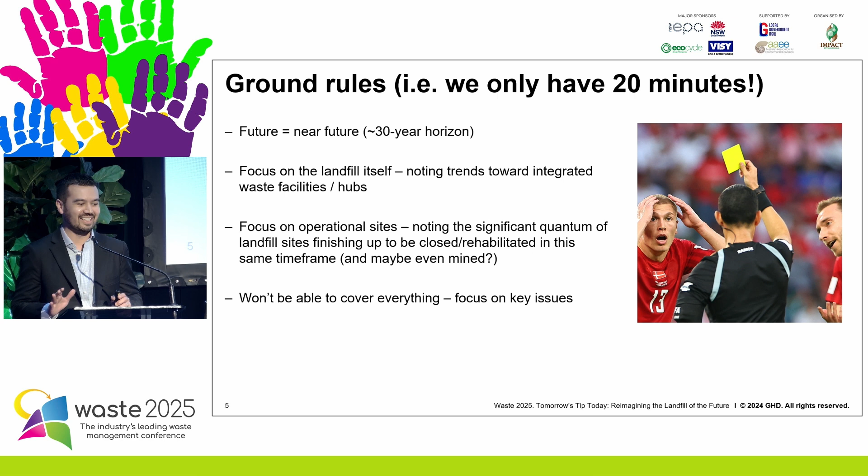I think I'm repeating myself here. I won't cover everything, I'll try and cover as much of the key issues as I can, but I'm happy to talk about it later.

It would be remiss of me not to talk about the modern landfill before I talked about the future landfill. You'll have to humour me - I'm sure most people in this room know what a modern landfill looks like, but I'll quickly go over it anyway. There's a nice picture up there of one.

You have the liner system that goes around the base there. On top of that you have a leachate drainage system, typically gravel with pipe work. Above that we have the waste itself being placed in horizontal lifts with covering going on, and eventually we put that final cap on and seal it.

In terms of leachate, we're extracting it from that drainage system and then sending it to some sort of storage solution. The picture there has tanks, but typically we use ponds. Then we're thinking about disposal - are we treating it first and then sending it to sewer, or are we looking at things like irrigation? There are a number of different methods we use in Australia.

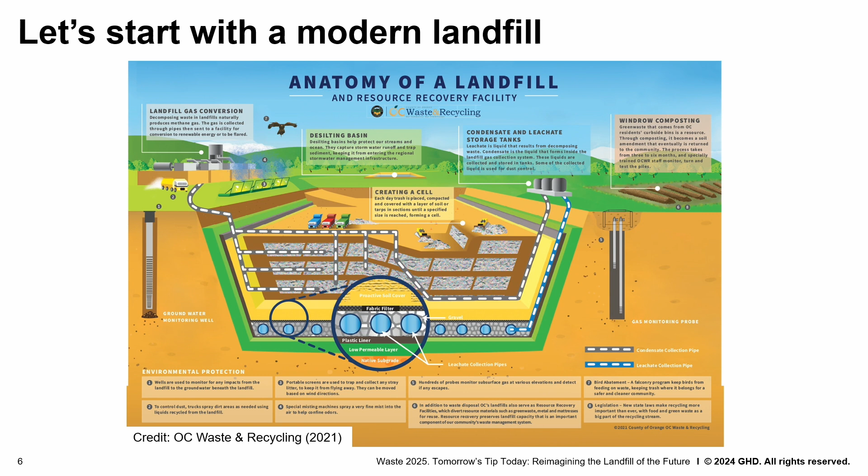From a gas point of view, if it's viable we're extracting gas out of the system, and typically in Australia we're looking at whether we can generate energy with landfill gas engines, or if that's not viable, at least we're sending it to a landfill gas flare to reduce that greenhouse gas emissions footprint.

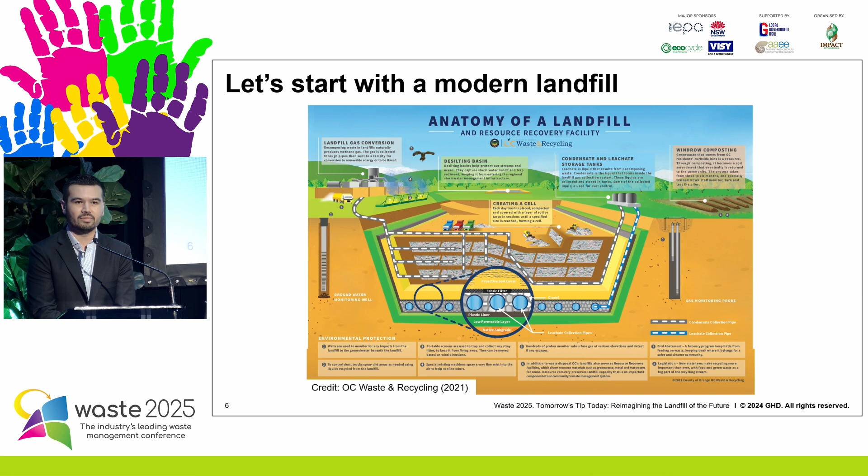The other one we've got there is the monitoring devices. So we have some groundwater monitoring, landfill gas monitoring, and surface water monitoring as well - all these things we do just to make sure our sites are complying with their licenses and that we're able to pick up issues if they arise.

So I'll start with containment. A lot of this draws me back to - I've done a lot of designs of industrial facilities and hazardous waste facilities, and I think when we look at these concentrated residual waste streams, that is generally where we're trending.

When I look at the design side of things, for a general waste landfill at the moment, it varies slightly across Australia, but generally you're looking at a clay liner alongside a geomembrane working in composite. If you don't have clay, you can look at an alternative like geosynthetic clay liners. But it's a pretty stock standard design.

When you're looking at these facilities, it's likely we can't just roll that out - we're going to have to think about more site-specific testing, whether it's testing of the leachate quality, the waste characterization stuff, and then playing that in with how we test our materials for our liner systems. So a bit more thought and refinement around how we look at that.

From a component standpoint, we have these composite liners in industrial facilities. That's not enough - we have to look at what's called a double liner system, so we're effectively taking that liner and doubling it up again. That may be required, particularly when we think about the PFAS problem we have.

There's a lot of research happening with PFAS at the moment. One of the big ones that's come through, there's a professor by the name of Kerry Rowe, very famous in our field - he's actually an Australian, he's a good guy. He's picked up that PFAS has a real impact on the service life of, say, geomembranes and things like that.

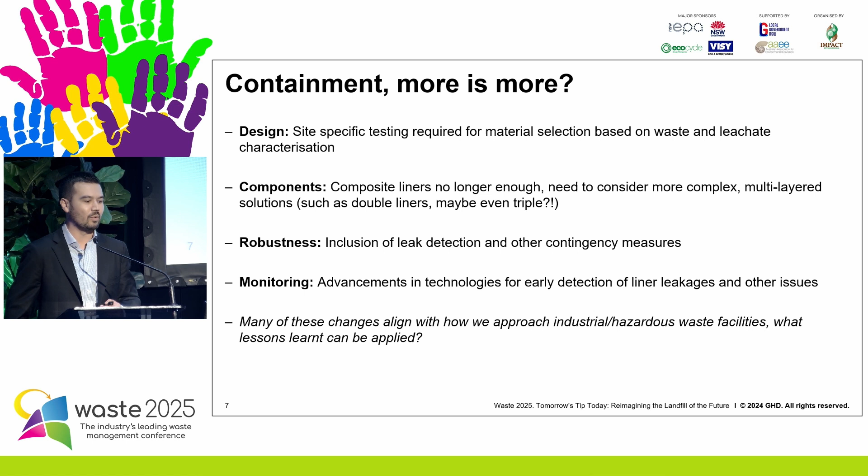Landfill gas. So I'll be careful here because I've got Dr. North in the room, but I'll try and stay in my lane a bit. Landfill gas is a great field for incremental improvements. We've been seeing that year on year. I remember when I started in waste 15 years ago, we had landfill sites that we'd look at and say, well, it's not really viable for us to get gas out of this site. But now we can come back to these sites and say, actually, with our increased optimization of our extraction measures and things like that, we can now get gas out of those facilities.

Things like that, we're seeing battery storage going alongside our landfill gas engines. We're seeing all sorts of improvements there. And in general, it's got a great environmental outcome in that the more gas we get out, the less fugitive emissions we're seeing get out of our system. So it's all good news there.

Refinement, and look, I'm a little bit biased on this one because our company does a lot of work in this space. There's a real opportunity, we think, around converting that landfill gas into renewable natural gas. And I say that because you look over in North America and Europe, there's a lot of activity in this space. You're seeing, I think, about 110 renewable natural gas conversion facilities, either in planning or that have been built in America, and there's plenty more to come.

And the reasons they're doing this: there's opportunities to reduce the emissions. You're refining that to a biomethane, essentially. And there's a lot of revenue potential putting that back in. Granted, look, that is being driven a bit by market incentives. Things like, I put some examples there around North America having low carbon fuel standards, tax credits for renewable fuels and things like that. So there is a bit of requirement of the market creating some incentive and intervention for that happening. But given what we're seeing overseas, it's very likely that that's going to happen over here as well.

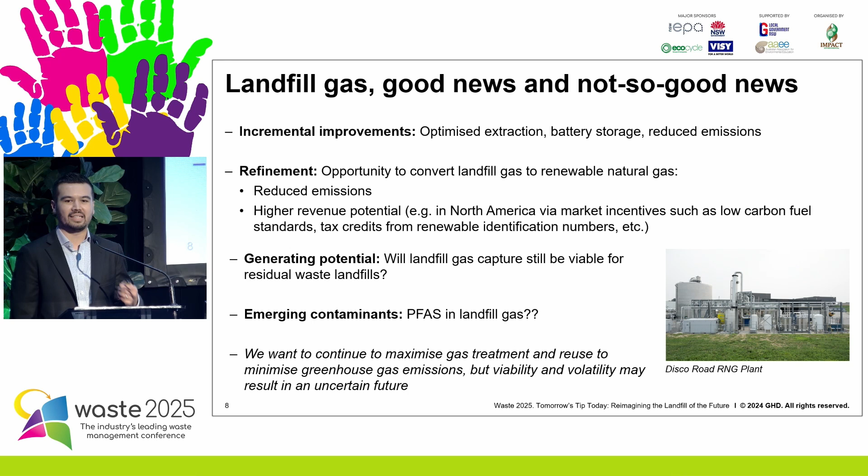So definitely a bit of a change there. And then PFAS, everyone loves PFAS. They've done some research recently and found PFAS in landfill gas emissions as well. It's just getting everywhere - another problem that may impact our feasibility. We're going to have to come up with a solution if we don't have one already, and the regulator is going to turn their eye to it at some point. Again, it's just another challenge to overcome, and maybe it impacts how we look at these things moving forward.

I've lumped in leachate and surface water into one thing, just to make it a bit simpler here. So climate change - if you're not aware, recently the Australian Rainfall and Runoff Guidelines were updated with climate change projections in there. It tells you how to apply that to your projects, say for sizing surface water infrastructure. It's a bit of a dog's breakfast at the moment - everyone's still trying to work out what it's actually telling us to do and how to do it. But we know what it means: we're going to see higher and more sustained peak events. We've seen it in the last couple of years with all these La Nina events.

It's really going to put a strain on our systems. In particular, we're going to see more leachate, obviously, and we're going to have to think about increasing the size of our surface water infrastructure. If we're starting to look at new sites, do we have siting constraints that we didn't have before around floodplains and sea level rising? So it's really about thinking more into the future - you're not sizing things just for today. You're thinking about how long your facility is going to last and future-proofing it around that. So just a bit more nuance and thought around that.

Again, PFAS - I guess other people might think differently, but I think it's at a bit of a standstill at the moment. Everyone's cognizant we have an issue: we have PFAS in leachate. The regulator wants us to get it out. The Water Authority is saying, well, maybe it makes more sense for the landfills to be doing it. The landfills disagree, and so there's a bit of a standstill around who's actually going to deal with this problem.

Putting that aside, say if PFAS removal had to happen at our landfills and we had to roll out treatment for that, it starts making you think about our disposal mechanisms. If we're going to apply such advanced treatment to get PFAS and other contaminants out, do we even need to send it to sewer anymore? Do we have such high quality water that we can look at simpler mechanisms, like just irrigating on green fields or releasing to natural waters? It's something we don't really do in Australia - the regulator doesn't like that idea at all, but it is done in America and other parts of Europe. Potentially we go down that path if we're having to spend so much time, money and effort on removing PFAS and other emerging contaminants.

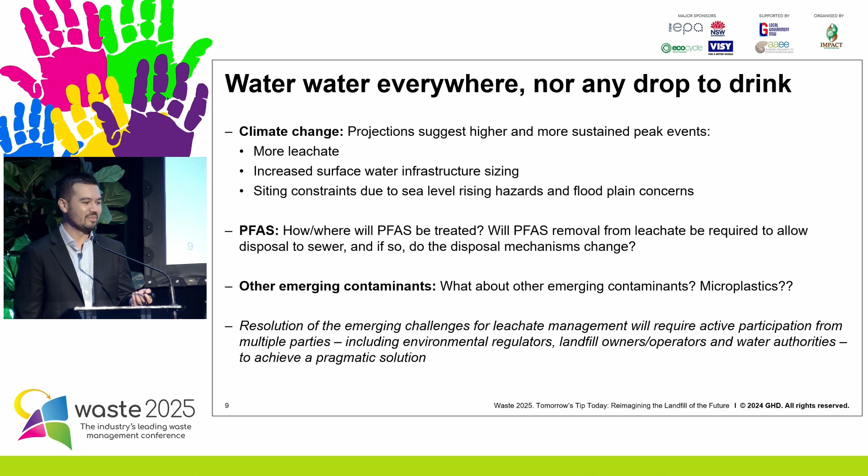Yeah, again, I love the robo landfills ones. Look, we already have a lot of great technology at our landfills, anything from drone surveys to the instrumentation and control we have for leachate and landfill gas. We can run these systems basically from a computer, another country away. It's fantastic, and this will keep going. We're seeing a lot of movement in the landfill gas monitoring market and using drones to monitor landfill gas, so hopefully that gets rolled out soon.

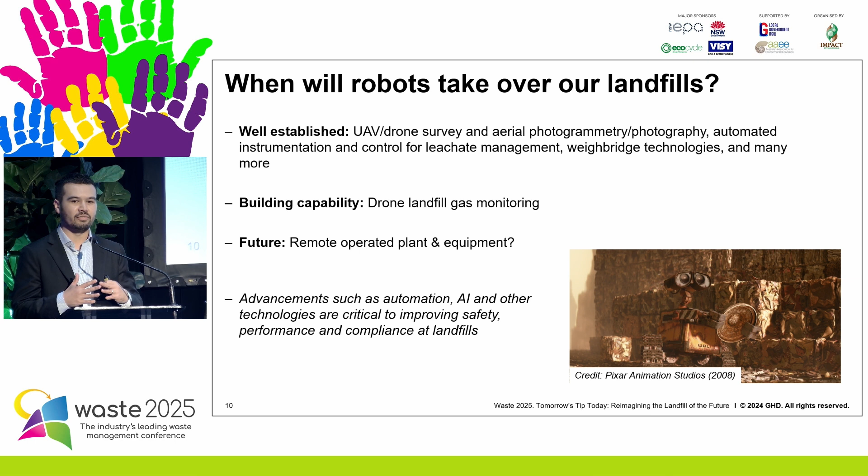We're already seeing it in construction. There are certain plant and equipment that is remote control. Do we roll that all out? Are our landfills literally run by robots at some point? Maybe, maybe not. But we should really be considering these innovations. And I think the big takeaway for me is innovations and our regulations always have a bit of a balancing act. We don't want to have too strict, stringent environmental regulations, to the point that innovation suffers, because all this stuff has the ability of improving safety, performance and compliance at our landfills if we get it done right.

Yeah, I don't think I'll speak too much to this slide, because to be honest, you guys have been beaten over the head with this stuff over the last couple of days. There's been a lot of great conversations at this conference about new waste infrastructure and how we're planning for it. I echo some of the words there about it being great to have a plan, but who's responsible for this plan? How do we have a pathway for getting to this plan, and is it reflected in our regulatory instruments when we come to get these facilities approved? I don't think there's too much more I'd want to add to that.

I've talked a little bit about siting. If we're going to look at new landfills, it's very unlikely to be in metropolitan areas. We're probably going to be putting them further away. How do we get the waste out there? All those sorts of challenges. Getting some leadership from the state, which we're seeing some positive leadership at this conference around that, and hopefully they keep delivering on that. How does the funding work? And social license is probably one of those big ones.

Another topic brought up is saying, yes, the state government has a big role in this, but everyone in this room at this conference has a role in this. To me, it's a lot about portraying landfills as we want to in our industry, not necessarily demonising them, saying yes, they have a role in our waste hierarchy. It'll be a reduced role, but still an important piece of infrastructure we have to have involved in waste management. And also our general facility operations, making sure we're operating those things as best we can, because we all know there's one issue at one landfill somewhere and there's a big domino effect, and all of a sudden the whole industry is impacted by that sort of stuff.

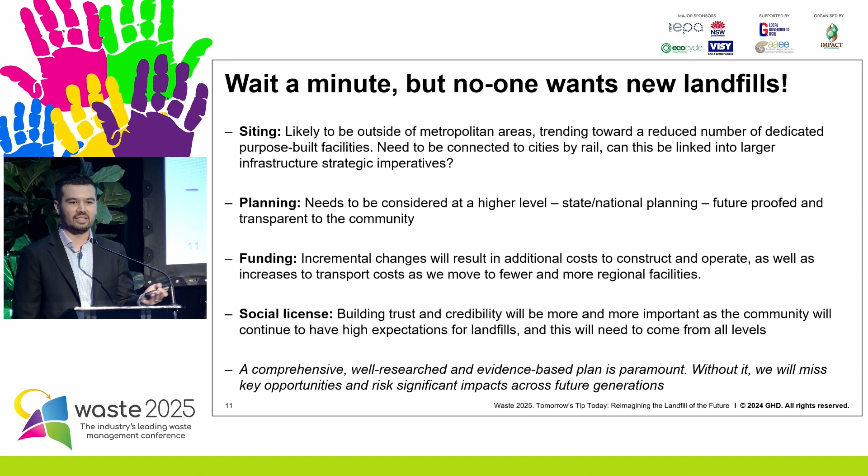So final thoughts. Yeah, look, I think nothing really groundbreaking is what I'm talking about here today. I think we're not changing completely how we look at landfills or how we manage them. We're not reinventing the wheel. It's more about that incremental change and staying ahead of the game. And I think we have a lot of opportunity to look internationally, say at North America or Europe, where they're a bit further along in their landfill journey, or even just look at general industry trends and be ahead of that. And there is that opportunity. Are we taking advantage of that?

I just said it, state and national leadership is important, but we all have our part to play, so let's make sure we're all doing what we can, because landfills are going to be here for the near future at the very least. Again, talk about that balance, not only from an innovation standpoint, also pragmatic solutions around leachate. Have we got that balance around the regulations versus where we need to get to, and just refocusing in on what are we trying to achieve?

With PFAS, it frustrates me because obviously we have an environmental problem. Let's solve it. Let's reduce its impacts to human health, but it's all getting stuck in a money conversation. So it's trying to get away from that and looking at solutions.

Yeah, I think I started on a quote. I'll end with a quote: failing to plan, planning to fail.

I think there's already a lot of positive movement happening there, but we need to keep that momentum going. We need to keep planning. I look at some of the planning they put up the other day on infrastructure, and there's a lot of scenarios. Apparently now in Sydney, we don't have a putrescible landfill problem anymore, magic. But they're looking at those scenarios and it's like, oh, this is all going to get solved by two energy-from-waste plants not only getting approved but also getting constructed, and a landfill expansion getting approved and constructed. It's a lot of ifs there. And I would hope that there are multiple scenarios being modelled in all these plans, and we're catering for all these multiple scenarios, because we don't want to get caught short, particularly in a field like landfills, where if we have to all of a sudden augment that, it's hard yakka to get the community on board with that. So, my final thoughts. Thank you.

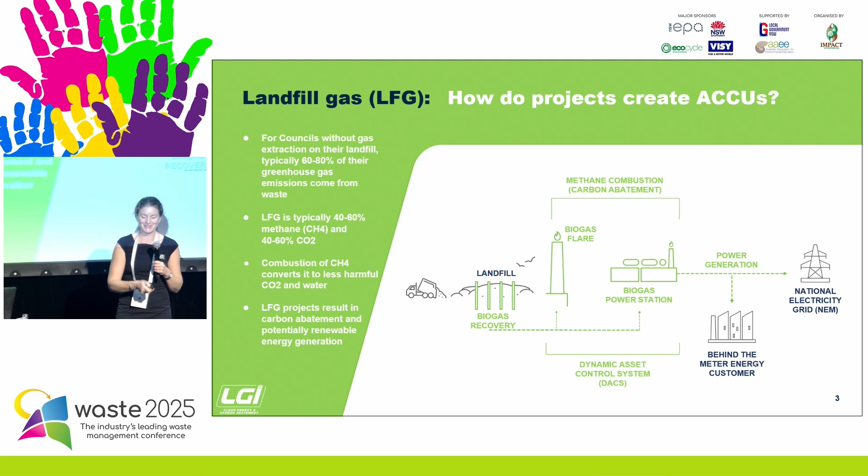So now we get to the interesting part. In Australia, since the Carbon Farming Initiative, the CFI Act, was introduced in 2012, 2013, there is the concept that every landfill in Australia ought to be doing something, ought to have some level of gas capture. So the first 30% of anything you do is considered the default baseline. When you capture all this gas, you would get carbon credits for 70% of everything that you're capturing.

Now, this landfill gas methodology has been going under a government review, if people are aware of the Chubb review, where the government engaged Professor Ian Chubb to review, because there was a concern that there was a lack of integrity in some aspects of the ACCU scheme, the ERF, and landfill gas methodology came under scrutiny. Unfortunately, these things take time, so we've been working on this new method for about 14 months. It's a fast process, as you can see. But at the moment, we have a landfill gas methodology, and we are anticipating a new landfill gas methodology. It is complex.

The calculations—I won't say loopholes, but the curvy bits around this, how you apply it to a site, what gives you credibility, what allows you to be eligible—it is complex. But if anybody has questions about projects or wishes to discuss further, please come and see me. Unfortunately, I've been living this for about 12 years of my life.

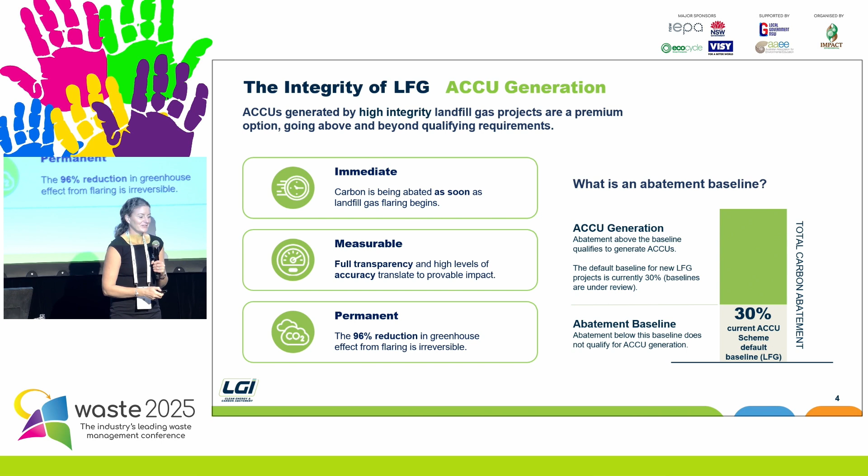The wonderful thing about landfill gas credits is that once that methane goes through your flow meter into your flare or engine and is combusted, it's a permanent destruction of the methane. It doesn't come back, it's not going to reappear. So it is the most fabulously instantaneous, verifiable, high-integrity credit you can generate under our current system. I'd encourage all landfills to consider whether they should go for this.

I'm going to give you some case studies, because we've found that a lot of local governments think their site is too small, too regional, or wouldn't be eligible to consider getting a landfill gas system. Not every site will be—there are some sites which are simply not commercially viable for a company like ours to assist. However, it's worth investigating because so many are, and we are in conversations with a great number of councils.

I'm going to go through 4 examples, and then do a very quick little exercise with some of the people in the room.

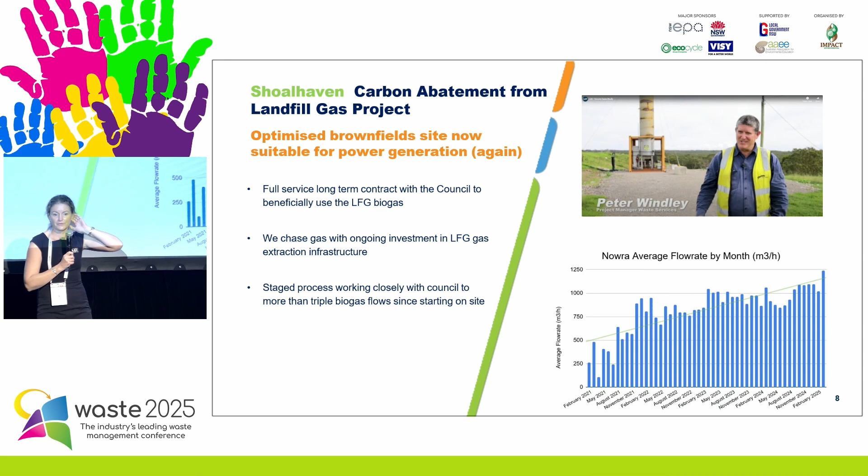This site is tagged for a power station, and you can see this is gas flow—the sort of flows we've achieved on the site. I'm going to keep going quickly because I'll get to where we're going, 5 minutes, yeah.

Finally, Taree. We have not installed the system yet, but I've included Taree because the Mid-Coast Council started the tender process about 2.5 to 3 years ago now.

When considering these projects, the procurement processes are onerous. We are seeing 2 to 3 years to obtain gas systems. We need to act quickly because the appetite for offsets, for carbon credits, et cetera, the policy environment is changing. And I believe that this window of opportunity will be closing or becoming less interesting in future.

But I want to now do a little something. I have a representative from each of the councils, except from Clarence, unfortunately, and I want you to hear from the people who have installed these systems and from the councils themselves. So my first question is to Christine Blanchard from Gympie Regional Council. Council went out to the market in 2016 with a request for tender and had a contract fully executed within 6 months. How and why did Council act so quickly?

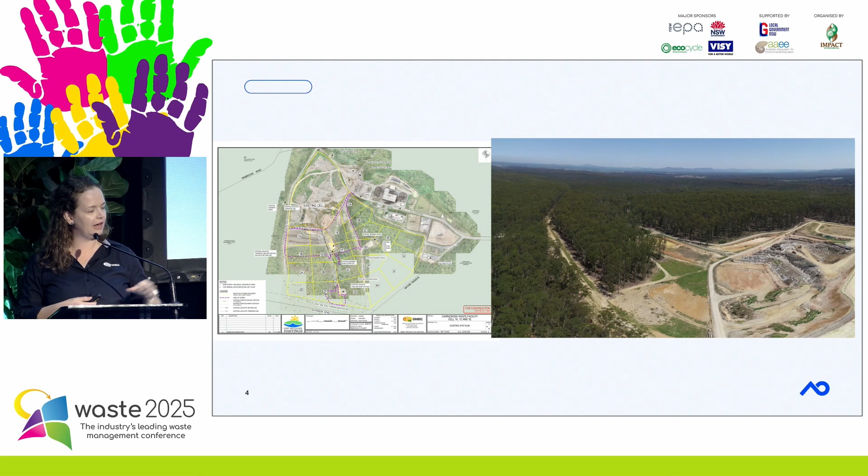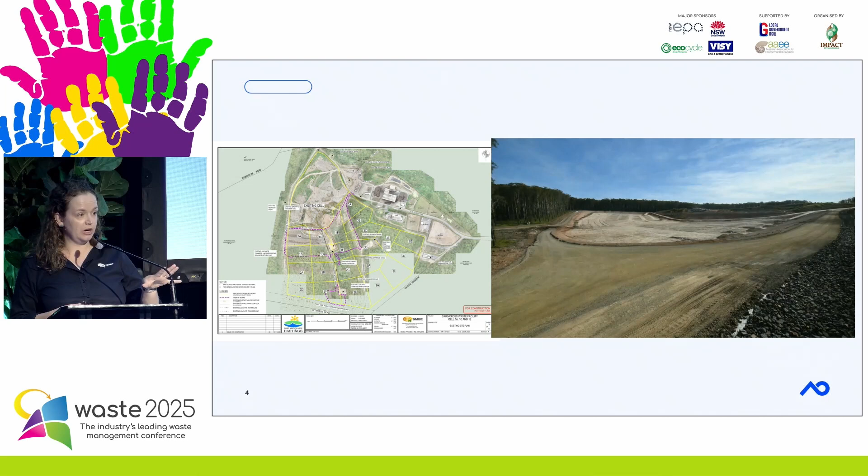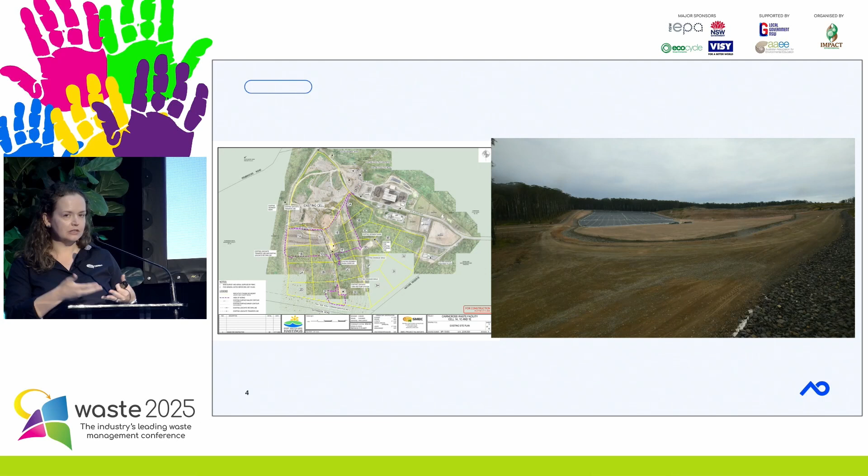It's a snazzy time lapse of the whole thing being constructed, and that's something we would definitely recommend for these construction projects. It's a proprietary product, we don't sell it, but lots of clients use them. It takes a photo every 10 minutes, and you can tell the contractors that, so you can make a pretty time lapse for your presentations, but honestly it's just useful to keep an eye on what's going on every day. We were able to monitor our construction projects across the country somewhat remotely. So yeah, you can see Cairncross being constructed there.

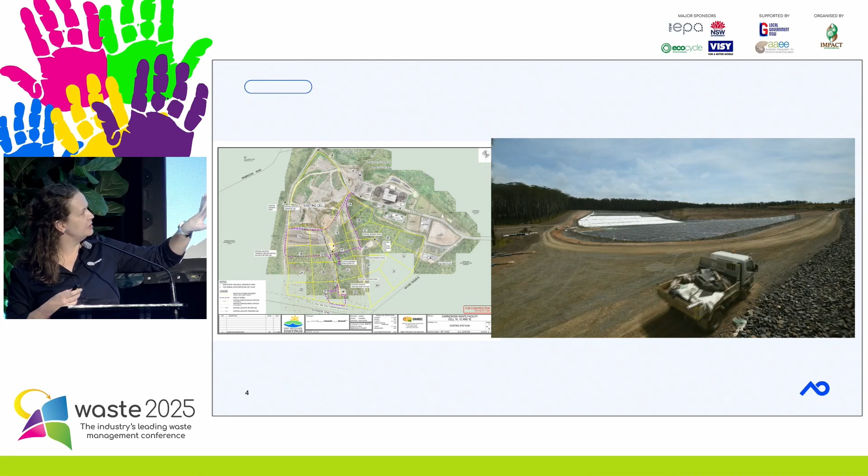You'll be coming across, there's a lovely flyover at the end that shows the stormwater separation bunds, which are there to minimise leachate generation.

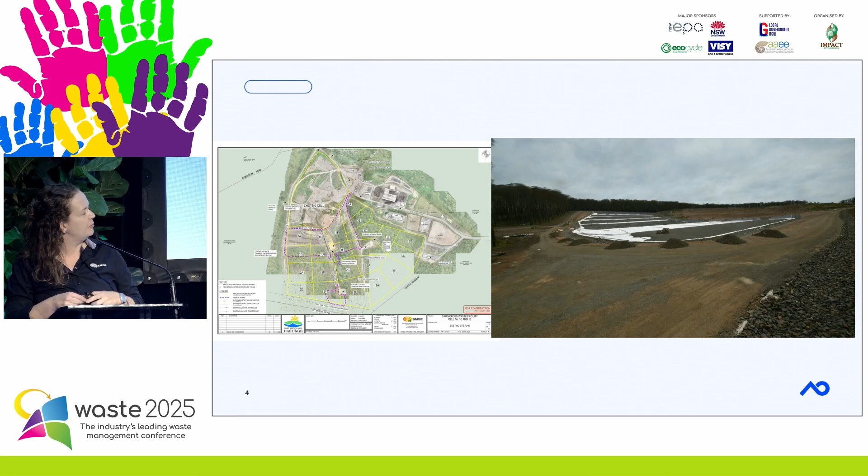I'm going to jump ahead, we don't need to watch all of Cairncross being built. Go watch it, it's on my LinkedIn. You can see the stormwater separation bunds, we're very proud of that one. Oh, there they were. Terrific.

All right, on to closure. Water flows downhill. Water management is a key principle of landfills. Everyone likes to think landfills are about garbage, or sometimes my geotechnical colleagues tell me they're geotechnical problems, but the majority of significant issues we see at landfills are water-based.

A quick primer, we've got a broad church in the room, as we always do in landfill presentations. We have three water streams. We have leachate, which is dirty garbage juice, water that's touched waste. We have sediment-laden water, which is water that's run off day cover, so it's picked up sediment and soils, looks like a chocolate milkshake. And you have clean water, which is stormwater, which is run off the grass.

When you're planning your site, obviously you've got high sides and low sides. I spent 5 years at university to be appropriately qualified to tell you that water will flow downhill. You need space at the bottom of the hill for your leachate and sediment dams. Obviously you understand the operations of your site.

Of the three water streams, sediment is the most relevant to capping. We'll go there in a second, but I left myself a note. I'm not talking about leachate today, but the other question everyone comes to ask me is, is my leachate pond big enough? And I will say, it depends.

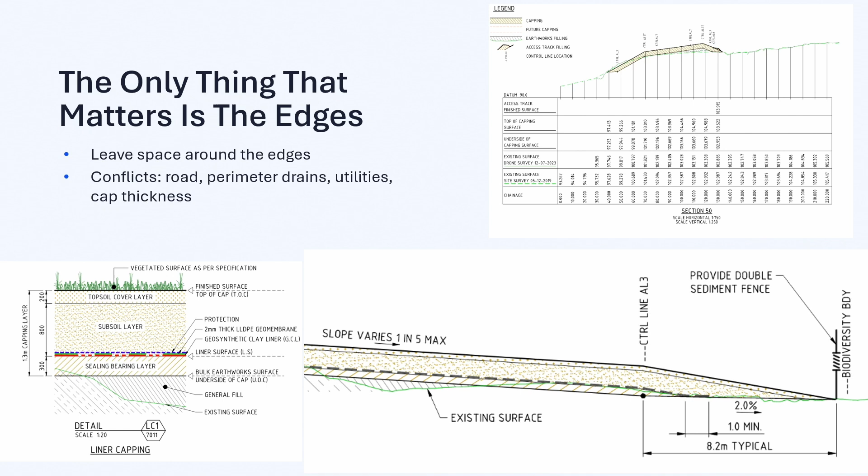So this detail here is a standard cap, 2016 cap with geosynthetics. That's New South Wales terminology that's sort of similar all across Australia and the world. That detail there is like 90% of the work, right? Put down some dirt, put down some low permeability, more dirt, more grass, off you go.

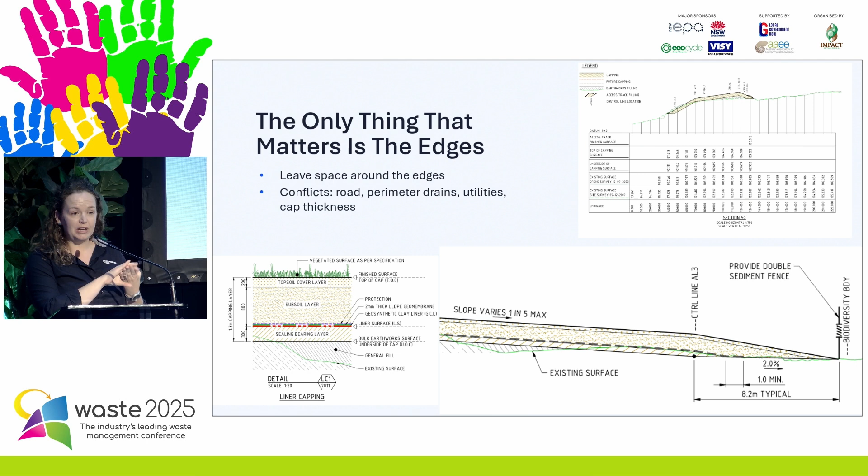The trick is what happens at the edges. The edges are constrained, so we need to think about your fence, where your property boundaries are. We need to squeeze in access tracks around the outside for monitoring and other uses. And we need to think about the drainage infrastructure, the open swales we discussed before for water flowing downhill. The cap also takes some room. Over here you can see the problem - we actually folded that down because we ran out of room. But the cap itself takes some room at the edge.

So the key message is that your waste can really only go to there. If you're placing waste, don't put it all the way to the fence, okay? Give yourself a margin at the edge. Space makes everything easier. If you're tight to the edges, get a proper cadastral survey. Most surveys don't include a full boundary definition. It's a little bit more expensive than a normal one, not anything outrageous, but it's just more than normal. It's not normally needed.

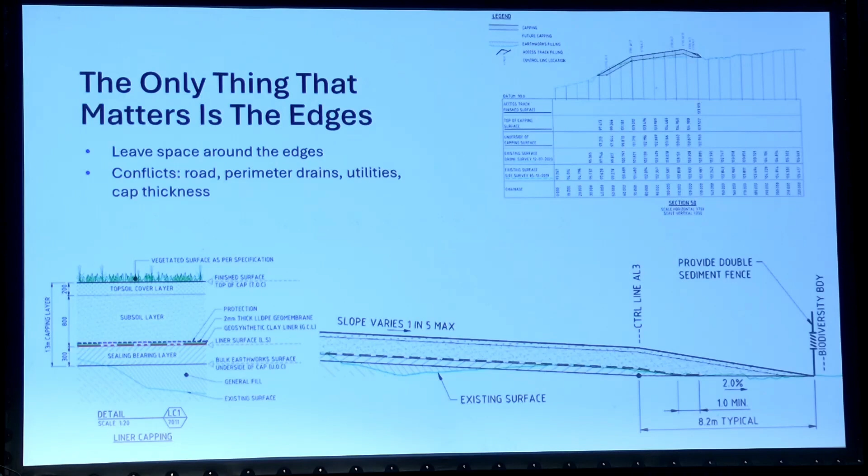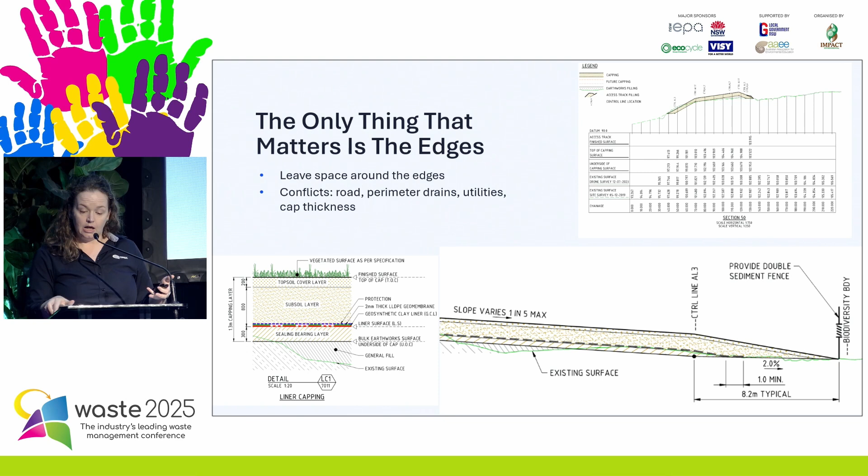The database extracts I would say are normally within 1 or 2 metres accurate, but I've seen some rural ones that are up to 7 metres out. So if you're getting jammed at the edges, and you're doing work at the edges, work out where your edges are. Clear definition of the edges helps. All right, I pointed to the right spot.

Slopes. This is aimed at helping you answer the question: how steep is your landfill? Again, a quick primer since we have a broad audience - engineers use 3 ways to talk about slopes: a 1 in something slope, a percent slope, or a degree slope. Here's a handy little table to convert between all of them for you. 1 in X is just rise over run, if you remember your triangles from school.

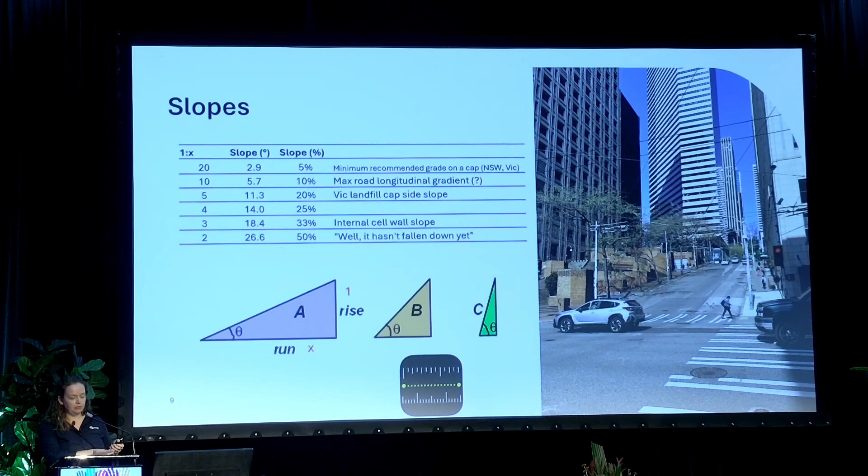Utilities, in-ground and overhead—where are your utilities? You don't know? You're in good company. Nobody ever does. We've hit more utilities than I care to admit in the investigation works we've done at landfills. If you can spend some time working out your best guess on what's in the ground anywhere there might be earthworks or geotechnical investigations, it saves a whole bunch of headache for everyone.

You can use a service locator, access your own site operator knowledge—often the operators have been there a really long time—or use a surveyor to put it on a map. Councils should have access to a GIS department, so you should be able to use that. I've always been amazed that councils seem to do water and sewer and stop there. You should be able to get your GIS department to do it.

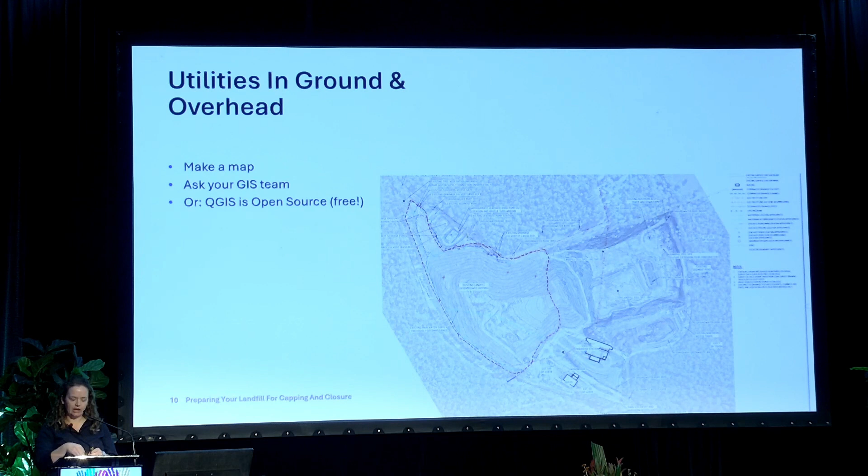If not, use a surveyor, and if you want to do it yourself, I'll give a shout out for QGIS, which is open source software. You can find your nearest computer-inclined millennial and get them to map it for you. We use that product a lot too, supporting our remote clients by sending us photos and locating them—so the use of technology is really supporting us.

I'm going to reel along. Extent of waste—how much area do I need to cap? Some sites are really well planned and that's known. A lot of our historic sites in New South Wales are a little bit higgledy-piggledy.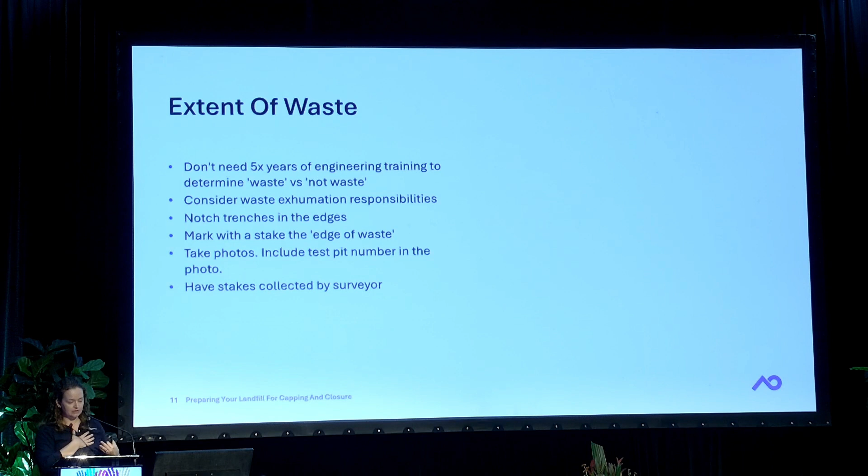On day one, I want you to tell me the edges of where this cap needs to go. We can do extent of waste investigations, but you don't need an engineering degree to dig a hole and determine if it's waste or not waste. It's certainly something you can do yourself.

We would suggest notching the side at 20 to 50 metre spacing, marking a stake as extent of waste, writing the test pit number, taking a photo—so we've got records—then having the stakes collected by a surveyor and put on your plan. See, you don't need me.

Oh, and be cognisant of your waste exhumation obligations. Some of our clients are concerned about waste exhumation and that you might need a permit. Don't forget that one.

Relocation of waste—this is something people often don't think about. For anything with geosynthetics, which is a lot of the caps these days, it's like wrapping a Christmas present. It needs to be smooth and regular. It can't be a hummocky, hilly mess. So we always have to do a bit of cutting and filling.

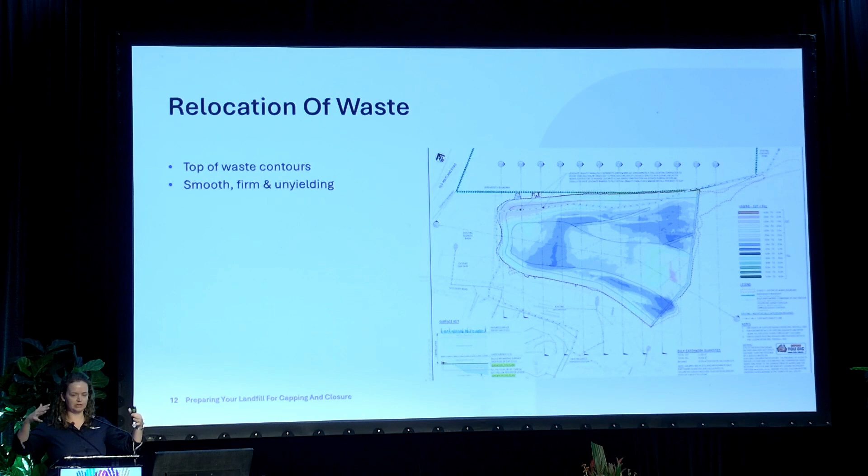So be aware that that's required. Again, waste exhumation obligations—sometimes we prepare waste exhumation management plans just to step through the OH&S side of those. Or, even better, save yourself all this trouble and just fill to the right profile to start with. If you've got top of waste contours and fill to those, it saves you a whole lot of problems.

So I think we're not doing questions now, so I'll pass it off. But thank you for your time. Thanks for listening to me, and hopefully you've left with a better understanding of the steps we go through to achieve capping and closure.

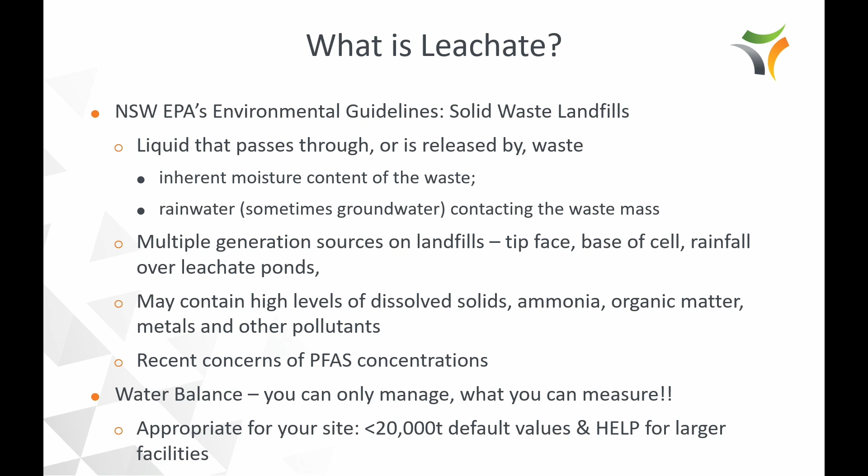And really, like a lot of the other presenters were saying, it's about planning for the future to make sure that when we are looking after leachate, we're making smart decisions along the way. So what is leachate? Basically, it's water that gets in contact with waste, or also where waste has been held. Of course waste is wet and we try to dry it out so we're not paying gate fees on water as much as we can. But also rainwater - and some people might have very special sites with soggy bottoms, as we like to call them - and groundwater touching the leachate, touching the waste, and therefore generating more.

There are multiple sources or locations of generation across the site. Obviously a key one people have to be mindful of is on your ponds as well - when rainwater falls on top of it, you're just generating more and more leachate. And of course it's got various contaminants of concern, with PFAS being the one really high on the agenda of late.

Water balance - obviously make sure you get one done, guys. You can only manage what you can measure. And of course the New South Wales guidelines give plenty of guidance on how to actually do that. For smaller facilities, less than 20,000 tonnes, there are default values. Beyond that, you've got to be looking at the HELP model - hydrological evaluation of landfill performance - a more detailed analysis of what we think is going to be generated.

First things first, we don't want it, so let's try to minimise generating it. A key part of that, as Kate touched on, was the capping side of things. But even going back to the very early days, it's planning for your stormwater and leachate management requirements from day dot of your facility - optimising landfill cell designs. It's great when you go to a client and say, look at this cell I built, it's 10 years of void space. Well, it's also 10 years of leachate generation. So be very smart about how you're actually designing your cells.

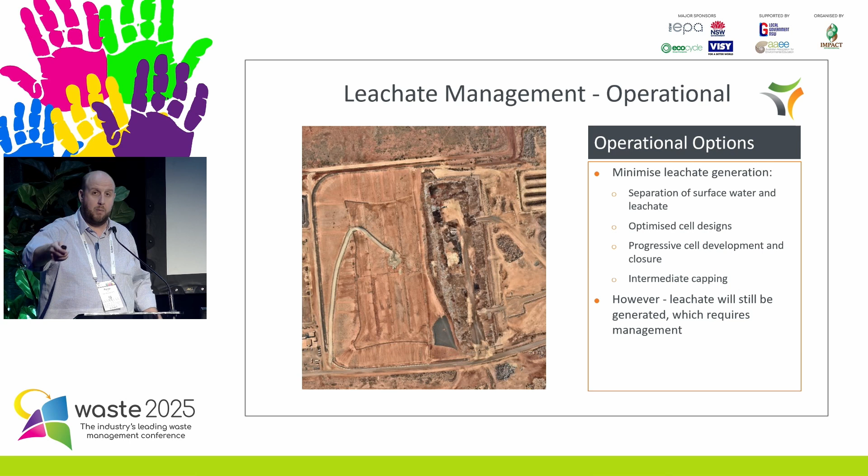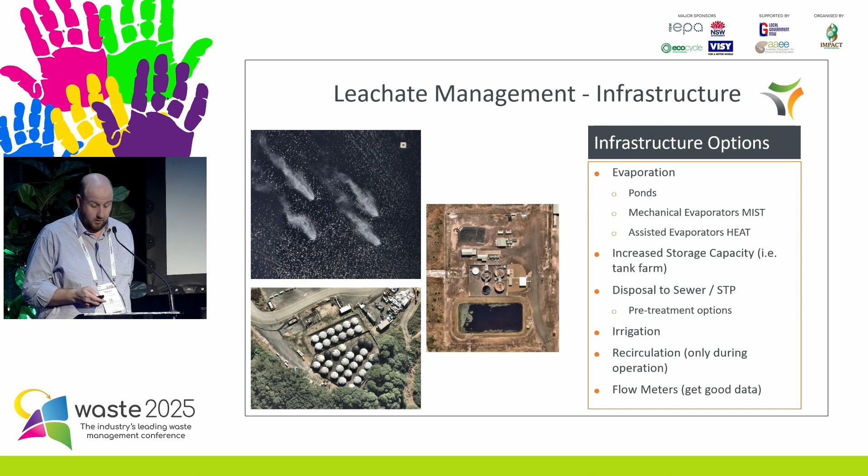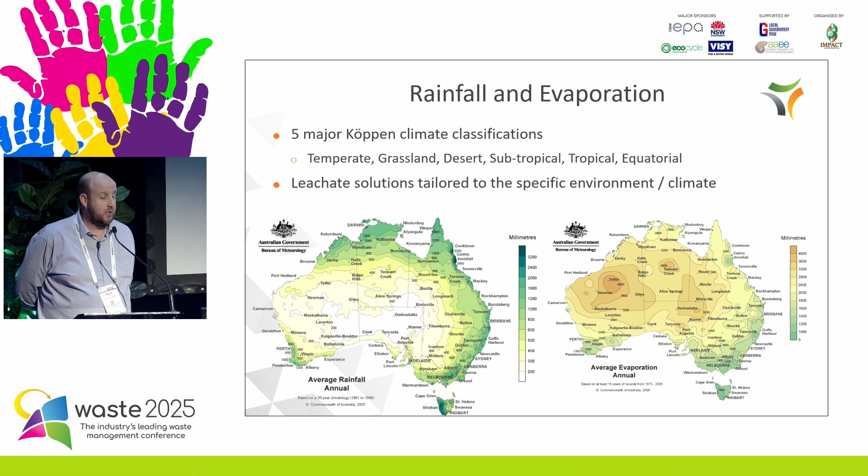Australia is a large landmass broken into 5 classifications in relation to climate, and your leachate solutions need to be tailored to your particular location in relation to generation and treatment.

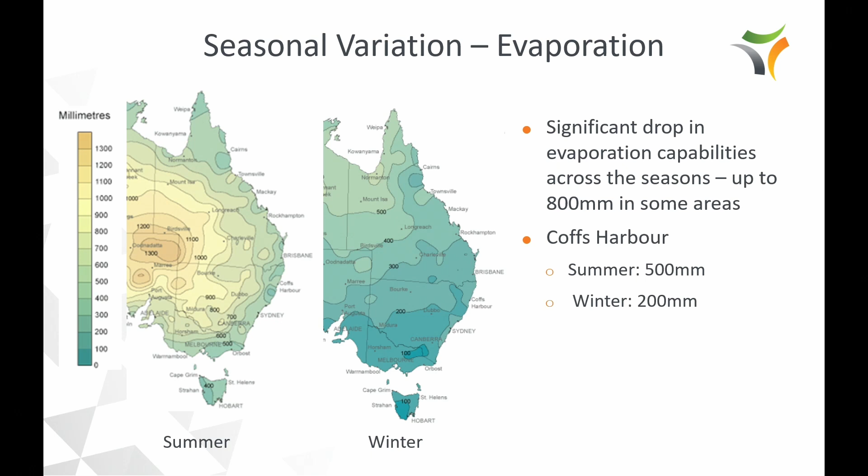Evaporation - a lot of people move to Australia for the sunshine, and we should try to use it to get rid of our leachate where we can. In some areas it's not suitable, but in a lot of places it is, which we'll touch on as we go through. Be very mindful of the significant changes across the seasons in relation to evaporation. In Coffs, summer we're having up to half a metre, but in winter it's only 200 mils, so we've got to be very mindful of that.

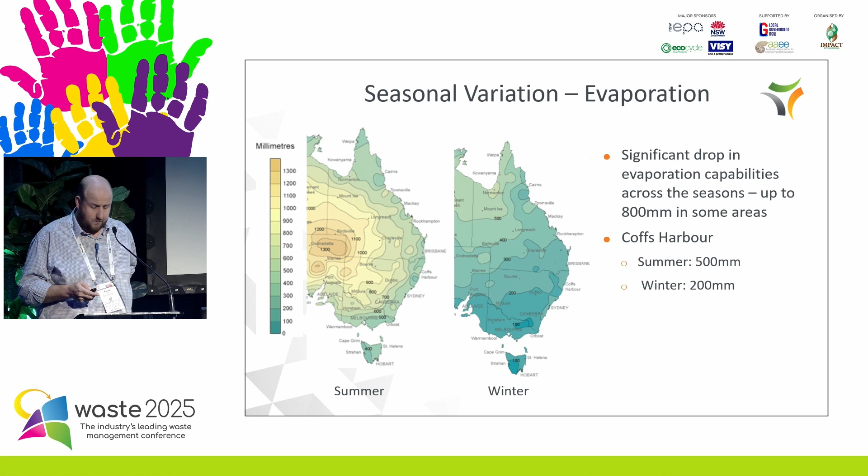If you look at the evaporation side of things in a bit more detail, I want to touch on how the team designs leachate ponds - I do not do that. As I said, plan early and do it once, do it right.

We've got to define our inputs, using the HELP model or other tools, to determine how much we're going to generate, and then the outputs - how we're going to get rid of it, what is the approach there. Being conservative with that approach is very important, because with leachate you want to do it once and do it right, so you don't have operational headaches as you go.

You've got to think about the average, the 50th percentile, but also what's going to happen in wet events. Also what's going to happen on a monthly basis, because the evaporation rates and rainfall will change over the year. Think about those seasonal trends, but also over multiple years as well.

The New South Wales guideline says 1 in 25 storm event for 24 hours - that's the minimum. But in cyclonic areas where we've worked in many locations, particularly in the West, we've designed some systems for 1 in 100 storm events, 72 hours, so longer duration, much bigger events. We've also got to think about the pan factor when it comes to evaporation - New South Wales is 0.7, WA doesn't have any guidance, but Vic BPEM has 0.8. It does vary around the world about how that works.

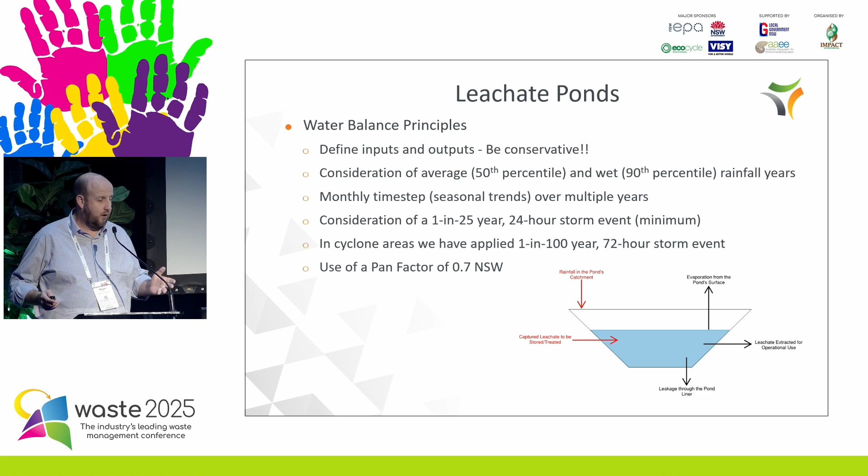A key one is making sure we're planning for multiple years, and particularly with New South Wales having had some wet years of late - nearly makes me homesick, the weather over here at the moment.

Also, if the pond's not available or you haven't got enough capacity, what else can you do? Tanks, or sometimes even holding in a landfill - mindful of saying that to the regulator. So we've got to be mindful of that. Having that longer approach is very important in relation to the modelling works we do for determining infrastructure.

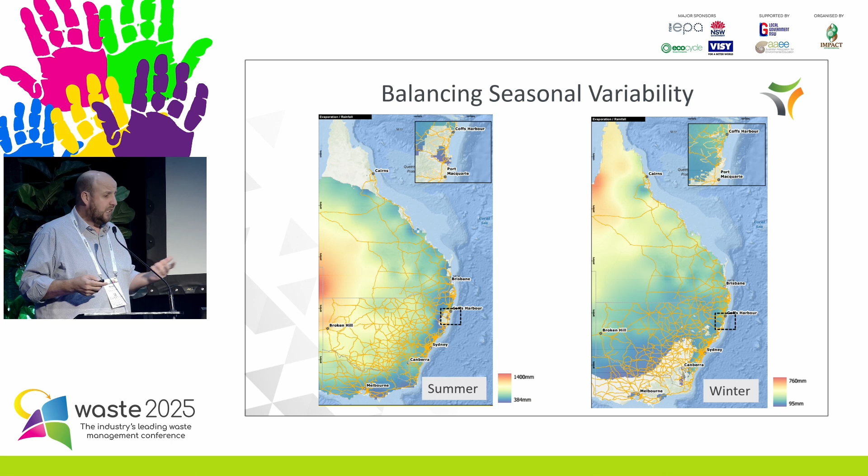We spoke about previously on the evaporation rates across Australia. The graph here we can see - this is just a GIS tool that we've developed, using some BOM data. This is probably where we generally start with our clients straight away once they come in.

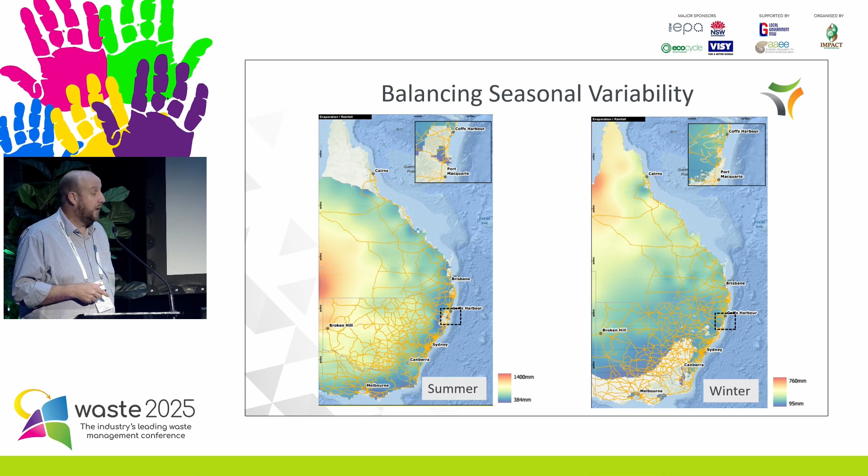Depending where in Australia, we can see in the summer we can have plenty of evaporation across the country. But in the winter time, you can see, no, we actually don't. So all the white stuff here, we're actually not getting any evaporation.

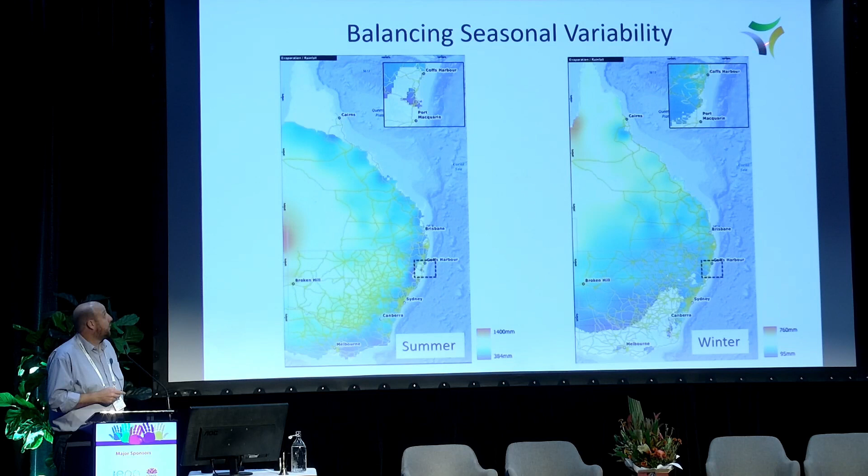The main thing we've got to be mindful of is that different areas have different microclimates. So here in relation to Coffs Harbour, we can see actually in the summer we don't have any evaporation, but in the winter we do. So be very, very mindful of your settings and plan accordingly.

As we spoke about with that pan evaporation rate, when you build a pond as your treatment option, or even if you have a pond just for storage, the pan factor, which is 0.7, means that would be further reduced.

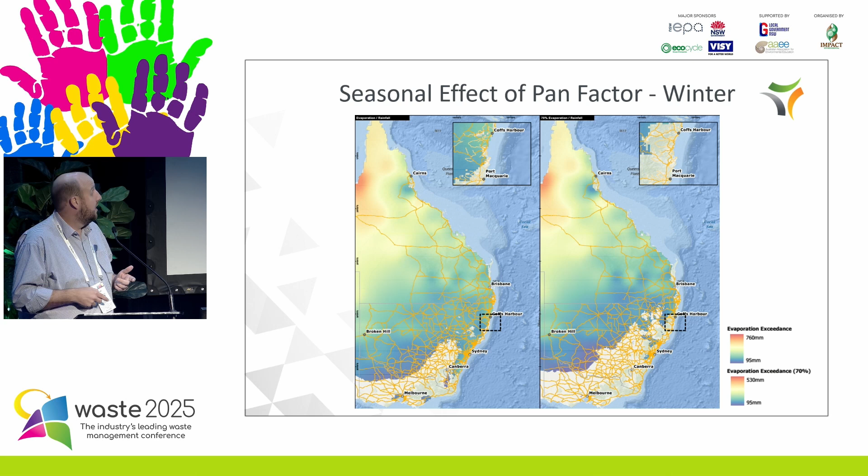As you can see here, this is winter again, and we're getting more and more white areas here. So it's very important that we take that longer term view, and also in relation to the changing climate we have at the moment. It's very important we're conservative in our approach to doing that.

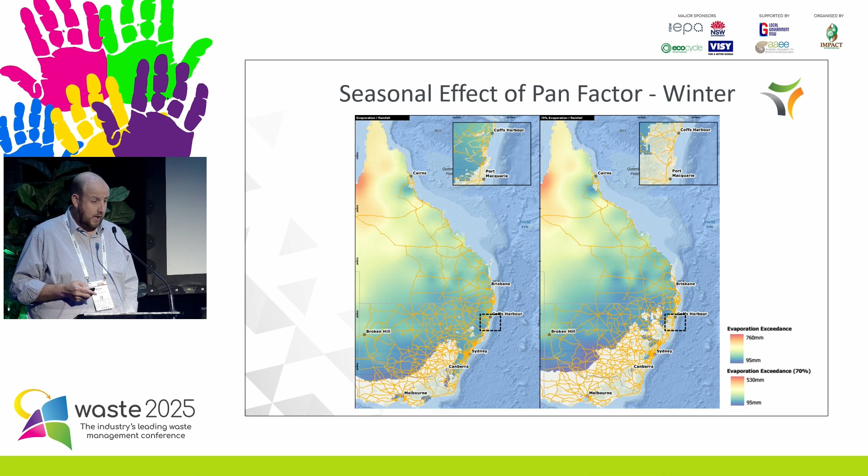Talking about ponds - I don't think I've been to a landfill, well, maybe one or two very small ones, that has no infrastructure for leachate at all. But whether you're using evaporation or just storage, you're going to have a pond. So it's very important that we think carefully when we're designing these facilities.

Location is key, particularly if you're trying to encourage as much evaporation as possible. So at the top of a hill, not in the bottom of a valley or something like that, maximizing the amount of sunlight that can get in there, and wind too.

Be very mindful of whether your pond is supposed to be for evaporation or storage, because the designs are very, very different. For storage, on many sites we've worked on, we have big storage ponds - small surface area, as deep as we can get them. But then on the side we have large, very shallow evaporation ponds.

So when we're pumping the leachate in there, it can heat up nice and quick and we can get rid of it. So be very mindful of how we're designing our ponds. Realistically, if you are looking for evaporation, it should be ponds.

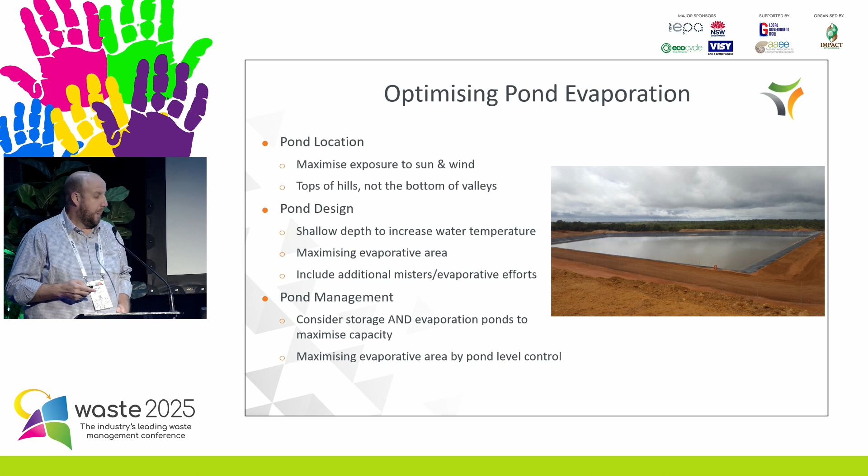Irrigation or recirculation. Irrigation is an option that's been used here in Australia. It's the first time I've seen it - also the first time I've ever seen a snake in the wild in Australia, my first year in Australia. I was scared, I could tell you, because coming from Ireland, irrigation of leachate is just no.

Obviously there's some untreated and also treated irrigated leachate nowadays, but you've got to be very careful about how you're doing that. Obviously not in the winter and high rainfall events. And if you are, you've got to have a very stringent monitoring regime to make sure you're not having undue downstream impacts in relation to irrigation.

Irrigation is a disposal method because you are going to get rid of it, while recirculation is not - you're just basically moving it around your site. So it is an option you can use if required, particularly if you've got a large event and high leachate generation event, but you are just moving it around, so be very mindful of it.

So again, definitely options you can use as required, but tread carefully. Think about it. Make sure you're doing it in a controlled manner.

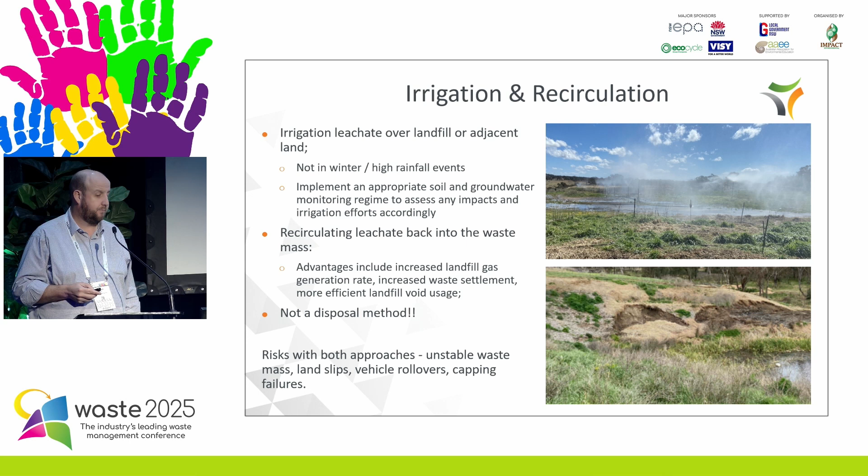Disposal to sewer, something that was very common with wastewater treatment plant, but either through sewer or tankering. Other parts of the world, it's really tankering to a wastewater treatment plant. So sewer is a common practice here, but there are licenses and permits that have been obtained in the past, and of course some of it is just currently untreated leachate.

We've seen from our experience, particularly in New South Wales and the Northern Rivers regions, and also in the South Coast, that there has been pushback from the regulators in relation to permitting this. That has been a big game changer for many of our clients or landfill operators. It's a significant change, generally one that hasn't necessarily been planned for, unfortunately. That means we have to think and reconsider what our options are.

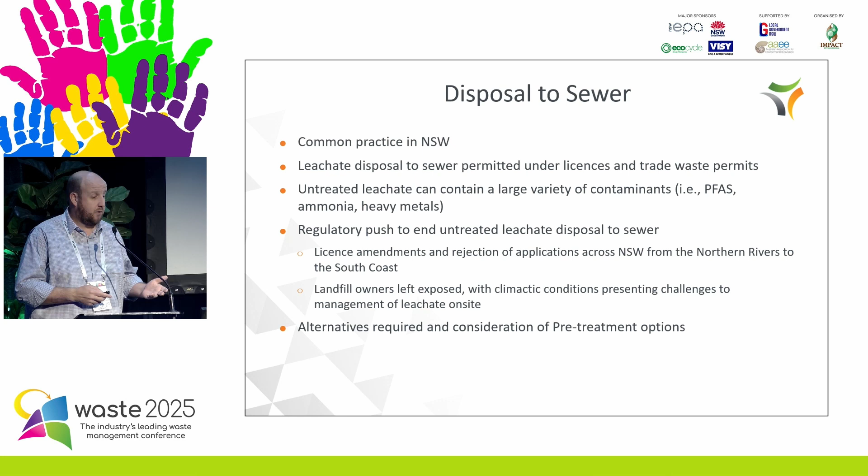Obviously, pushing towards sewer or a wastewater treatment plant means pre-treatment. I've been talking to many people here at the conference about pre-treatment options, and there are plenty of people with far more experience and knowledge of those than I am, but there's a range of them you can use. Realistically, it depends on your site location, your concentrations, what's in your leachate, even the volume you have, and also what you're trying to do with it. So there's a variety of options there: biological, physical, or even chemical treatment.

But most of the sites we're seeing use an integrated approach. Some technologies will do certain things, other technologies will do other ones. So you need to look at what your requirements are, understand them, and engage with these technology firms to see what's the best fit for you guys.

But what this is doing is having significant cost implications for landfill operators, and as I said, generally unplanned, really increasing the gate fees associated with your landfill.

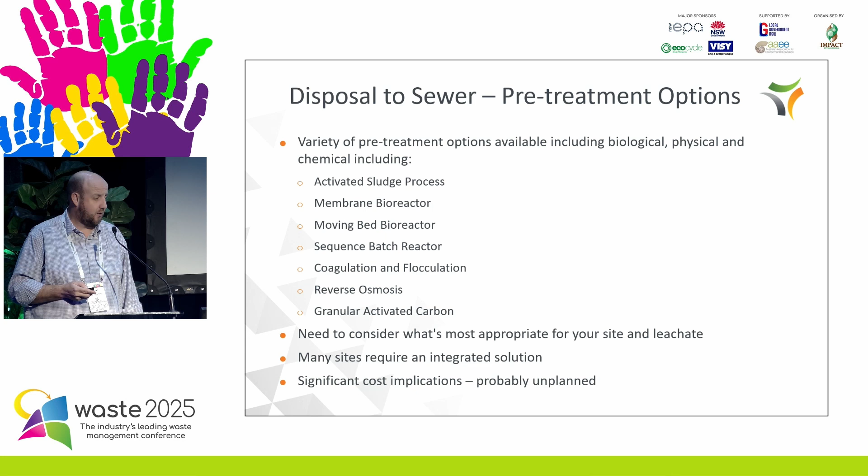The other one that we touched on, and even some of my fellow presenters touched on, is obviously these extreme weather events. We're having more and more of them. It's getting wetter and wetter, and we're having big events too, as in big downfalls. So it is coming, and we're seeing more of them more frequently. Even talking to the guys, 1 in 10 year events are happening so much more than actually not even 1 in 10 year events anymore.

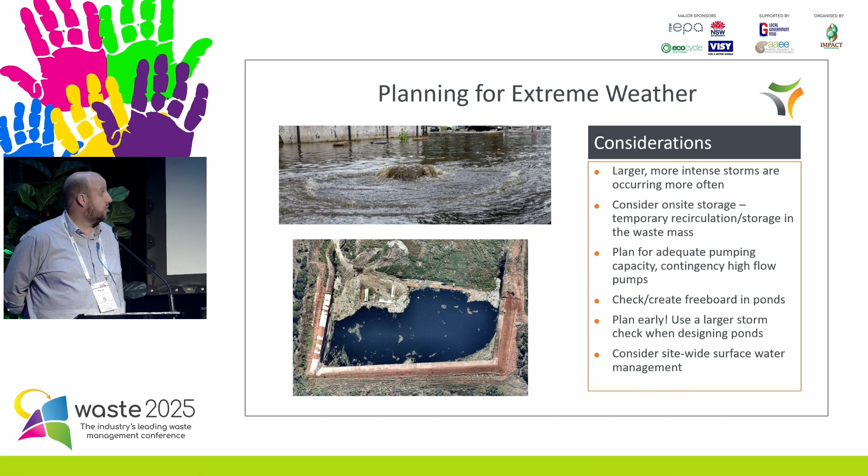So really take that conservatism into account, not just in the design, but in relation to contingency - are the pumps even suitable or large enough to pump out that volume of water from your leachate or from your ponds and so on? Is the freeboard enough? Really emphasising the point: when designing not only your leachate system, but your surface water system, which Kate touched on, that conservative approach nowadays with our changing climate is really important.

Key takeaways, guys. To summarise what I touched on: get a water balance done. It's absolutely critical - you can only manage what you can measure - and be conservative in that approach.

Be smart on your site design, particularly when you're setting up. We've been lucky enough to be involved in projects starting from day one - site selection studies, design, approvals, all the way through - and it's great. You can really see how being smart in your design minimises your risks and your operational issues and challenges later on. Of course, leachate is the main thing we're trying to avoid in relation to landfill engineering, so being really smart on that.

If you've got the sun, use it. We've got plenty of clients in Western Australia where there's plenty of sunshine, and really those clients shouldn't have leachate issues because we've got so much sun we can get rid of it. So just making sure we're recognising it, but of course that's not going to be suitable for everyone.

As I said, more and more scrutiny on that untreated leachate to sewer. So that's where we've got to be looking at pre-treatment options, which, from my experience in Ireland and the UK, is what has to happen, and what's regulated elsewhere in the world. I think you'll see it more and more coming into Australia. But that pre-treatment, if unplanned, is increasing your operational and capital costs associated with your landfills. So make sure we're planning ahead as much as possible.

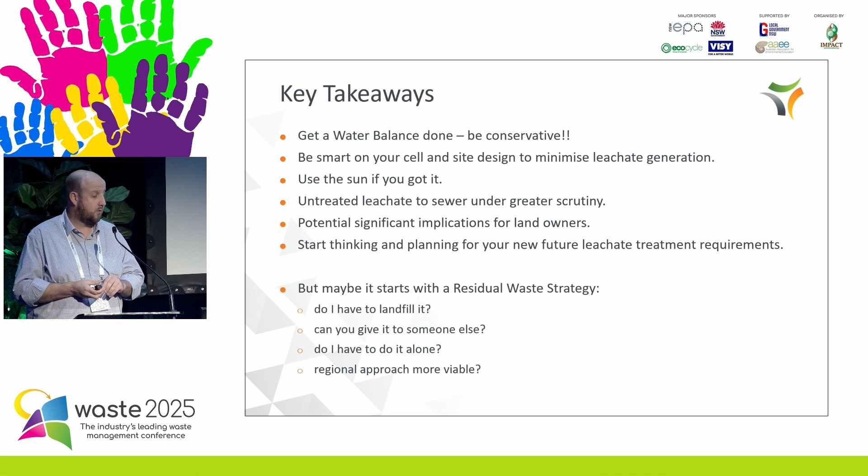So really, in relation to leachate, big changes are happening, and it really needs careful consideration. Don't be afraid to go back to the start and actually consider whether landfilling by yourself at this landfill site is the right approach for your council. And that's my presentation.